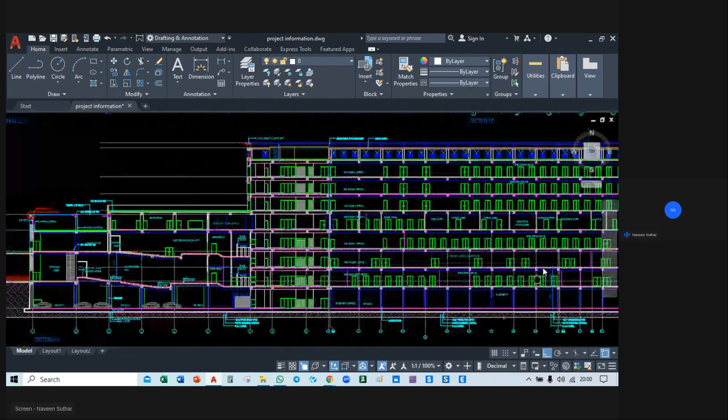You can see here, these are the elevations, and you will learn how to read the drawing, architectural drawing, and how to read the elevation, how to read the plan of the architectural drawing. There are many elevations, and you have to imagine, so your imagination power should be good. And what are the wall thicknesses, and what will be the column location as per the architectural drawing, and where is the toilet, where is the living area, and there are different areas as per the architecture.

This is, you can see, this is the auditorium in the hospital. This is architectural, and this is the structural drawing. The location of the column and beam should be decided as per the structural observation and planning.

And we will design the staircase, column, beam, and slabs as per the architectural requirements.

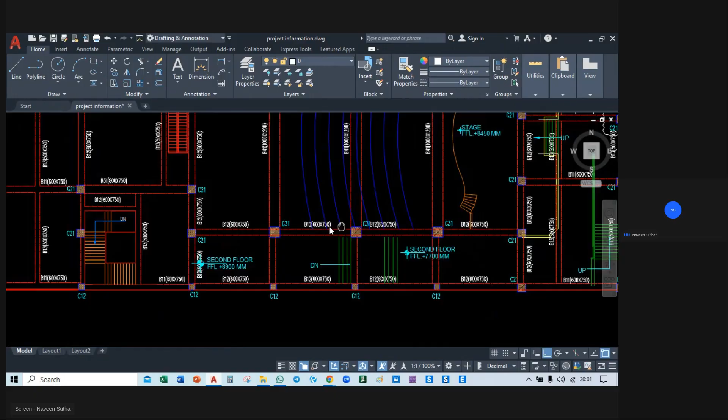This is the column and beam layout, and this is a building, it's B plus G plus 7, and similar many buildings are there. You can see, there is also one building like G plus 3, and I have designed almost 100 plus projects.

You can see there are a lot of buildings, and I think in the brochure I have mentioned only 10 projects, but I have worked on almost 100 plus projects.

As you can see, we have prepared framing as per the architectural drawing, every framing, and what should be the size of the columns and beams. This will be done after you gain experience of 1 to 2 years, you will be able to assign the column and beam sizes. But I will give you the IS code recommendations about the column and beam sizes. Right now I'm just giving you a brief introduction about the projects.

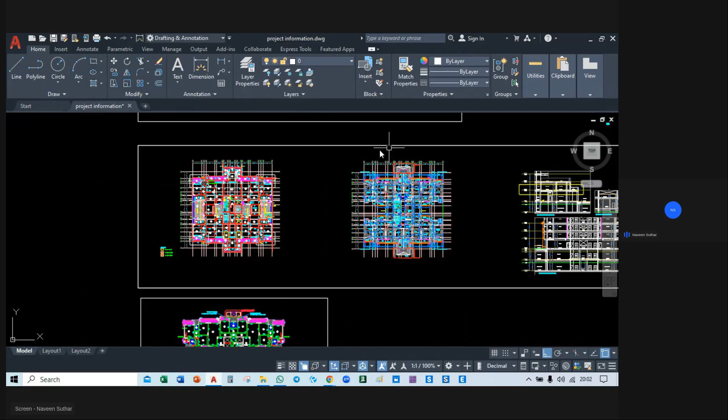You can see there are a lot of projects here. You can see there are very big projects.

So you can see these are some of the projects I have mentioned in this drawing, and you will learn about it. We will start from one building, the office building, and let me open the building project.

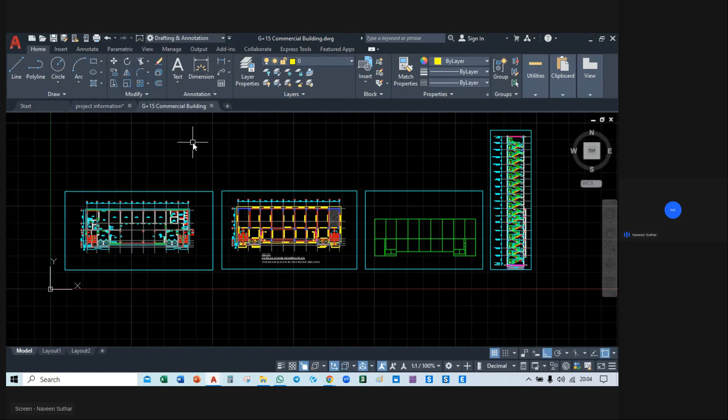So if you can see my screen, this is the building, it's a G+15 building. It's a commercial building, office building.

First we will learn how we can develop the center line, and how we will develop the framing, the column framing, and the framing of the column, beam and slab. From the framing we will develop the center line for import into ETABS, to draw the model in ETABS.

So first we will learn how to draw the center line, and you can see this is the architectural layout and drawing of the office building.

You can see these are the shops, these are the shops. I think this is the office building, there are some shops here. These are the lifts, and this is the staircase. These are the electrical room, the fire control room is there, the plumbing shaft is there.

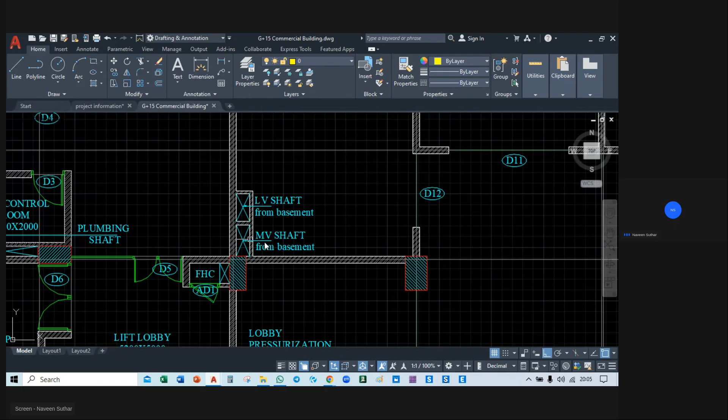These are the shafts for the basement. Some of the shafts are there, and these are the lift walls. This is a lift, cross lift at both sides.

Hello, Arnab. Yes sir. So first, tell me, do you know how to prepare the framing and how to prepare the center line?

No. Okay, so I think I will start from scratch, and I will teach you how you can develop the framing and how you can develop the center line. I think there is one more student supposed to join, and after he joins, we will start from scratch.

So first we will observe the architectural drawing, okay? Here you can see our architecture has given us the wall location and the column location, where the column location should be and where the wall location should be, and we can edit the wall and column location as per our convenience as a structural engineer, okay?

So what we will do first, we will remove the grid, okay? So what you can do, you can just copy this, Control C and Control V, okay? And you can just simply select this thing, select this area, and you will press B and space, okay? This the block definition will open, okay?

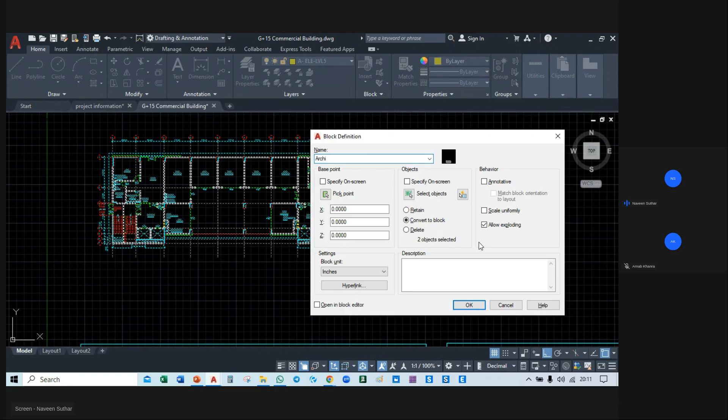So if you will make a block of the architectural drawing, okay, you can simply write archi, and if you will double click on this file, the block will be open, okay?

Now if you will do some changes in this block, okay, nothing will be changed in the outer drawing, okay? It will be just changed in this drawing only, okay?

Arnab, if you are comfortable in Hindi, I can speak in Hindi also, okay?

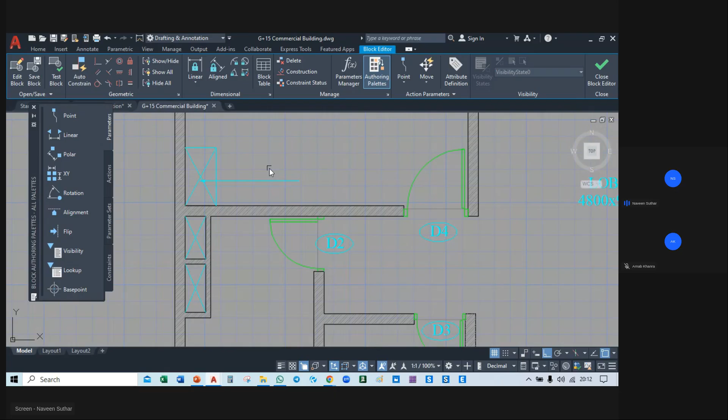Or you can just simply, if you select this and go to select similar, you can see everything is selected and you can delete just by one click. Okay.

So right now, if you can see, you can seeing only walls and walls, call walls. These are the brick walls, like the structural walls, and the column only.

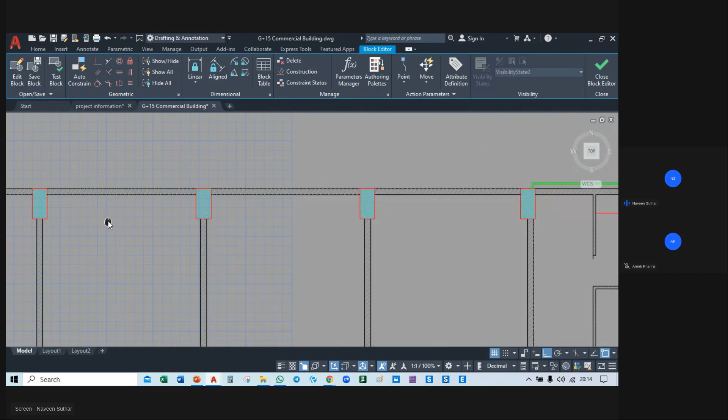So what we will do, we will take the column as per the architectural observations. Okay, so you can see the architecture is using the wall here and column at every grid. Okay, you can see. So we will take these columns.

Okay, and these are the columns already assigned here. And at the left area there is a wall, okay, you can see the wall is here. So what we will do, we will draw the beam.

So for the beam, what we will do, one minute. So the minimum thickness of the beam is 200 and the minimum thickness of the column is 200, okay, and we can't go below that 200 mm.

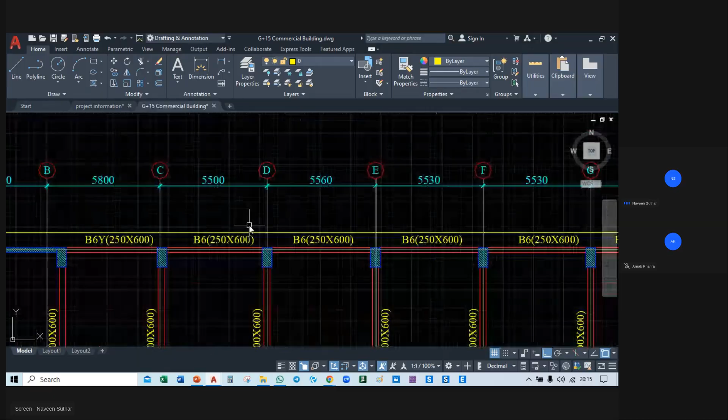So what we will do, we will just take, one minute, close, save changes. You can see in this the beams are taken as 250 by 600.

So what we can do, we can take 200 by 400, okay, also. So if the beam is failing in the design check, we can increase the size of the beam or depth of the beam. Okay, there is no hard and fast rule for the beam size.

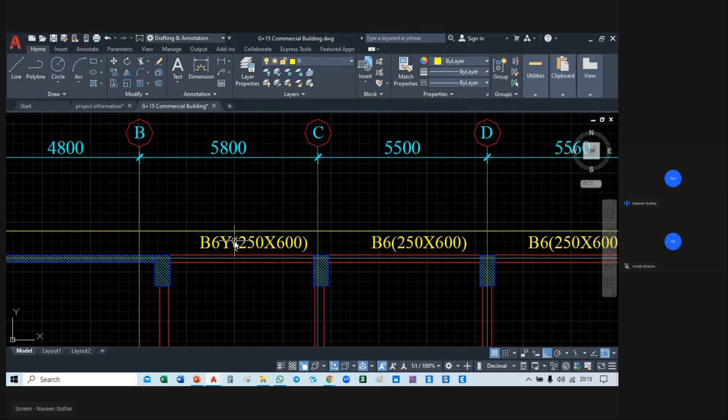So as per cost efficiency, we can reduce the reinforcement if we increase the size or depth of the beam, the reinforcement will be reduced, or there will be some criteria as per the codal provision also, the maximum reinforcement of the beam and the minimum reinforcement of the beam. Okay, so that everything we will check in the ETABS only.

So first what we can do, we can open this block, okay, and we can just simply press XL space H space.

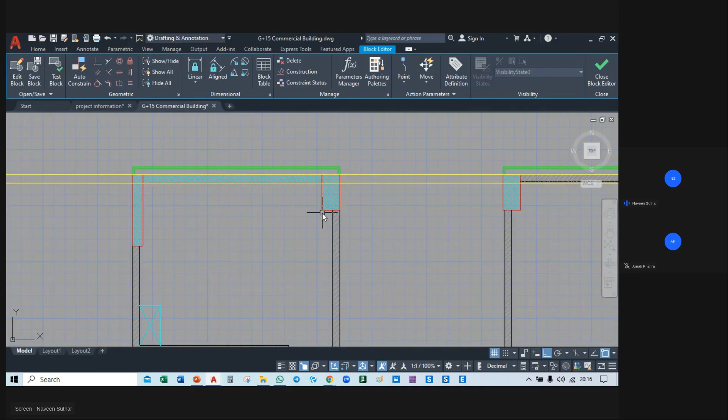So you can see that this line is there. So what you can do, you can simply paste the line at this location, and if you select this line, press CO space and pick a point here, just write 250 and enter, you can see we have a beam. Okay, so if you press TR space you can eliminate these lines at the ends.

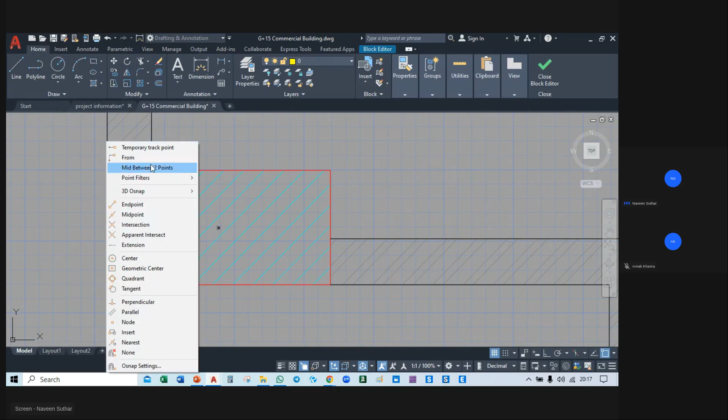Okay, so simply what you can do, you can select these two lines, press CO space and pick one point here. Or for the middle point, press shift right click midpoint, move the line, and press shift right click midpoint again. These are the two midpoints, and you can see we got the midpoint here.

So now what you can do, select the lines, CO space, and take a midpoint from here and paste at this point. So you can see we have a beam at this location also.

Format, you can simply move these lines also. And the same thing you can do at this location also.

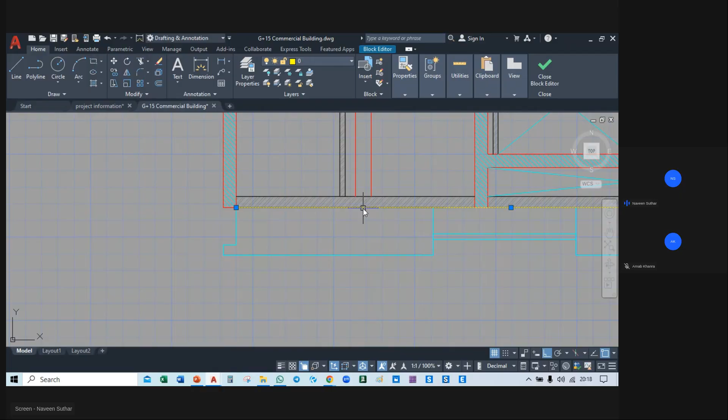Just simply copy this line, and it should be 250. And the same for this line, copy this line at this location also. You simply trim this line.

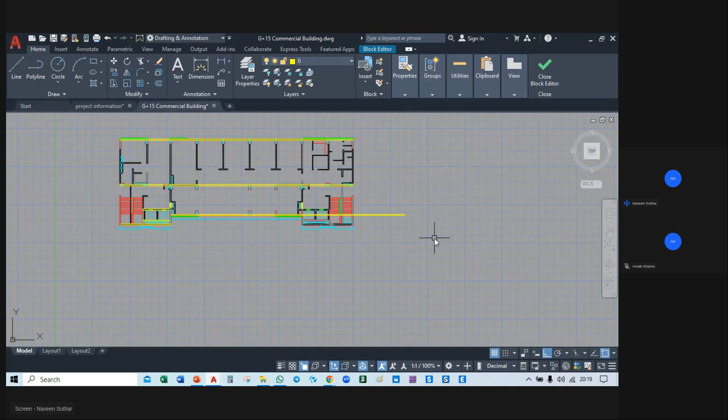You can simply copy these two lines, space, at this location also. Okay, you can simply copy these lines at this location also, and simply trim the line from here. You can select and delete this line.

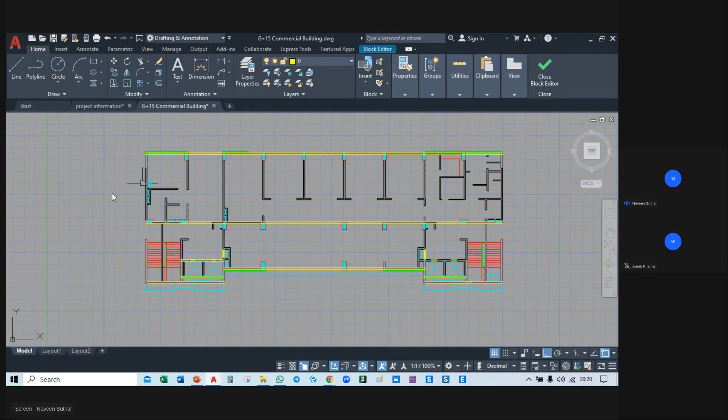So now you have to add the vertical beams. For that, we will just simply press XL space and V space. Click here, and simply select the line, CO space, and pick a point, just 250. And you can just trim from the ends, and delete the lines from the ends. You can simply copy and paste these lines at every grid.

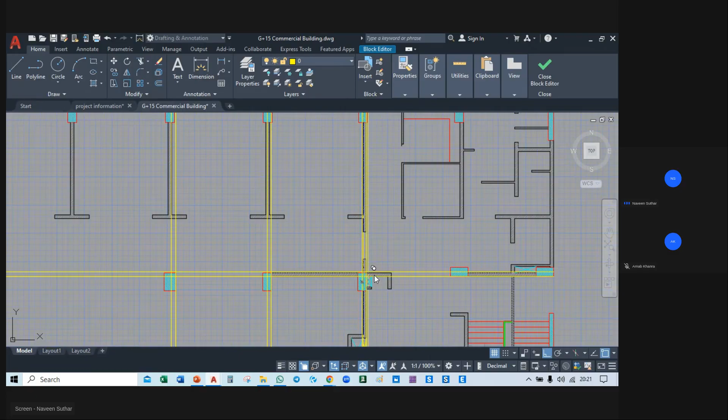So, if you want to add one new layer, you have to go to this layer property.

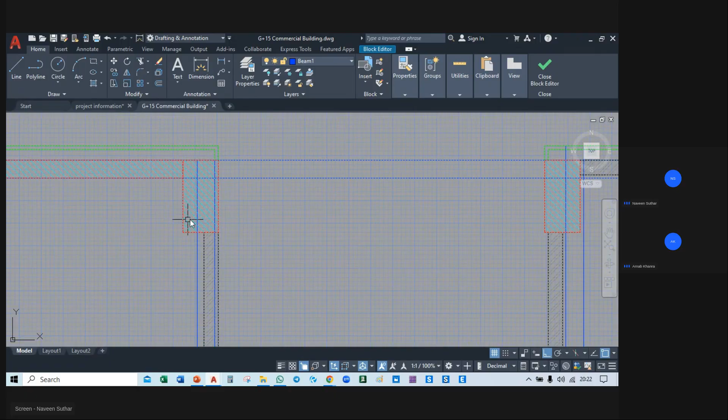So what you can do, you can simply select this, and select column, any column you can select. If you press X space, you can explode the block. So you can see now everything is in the block for the column, not in the wall.

So you can select column, or you can select beam, or go to select similar, and if you move this right, you can see this is our final product. This is a column and beam framing.

So what you can do, you can simply trim these lines from here, and from here. You can trim these lines, you can delete these lines, and trim these lines from here.

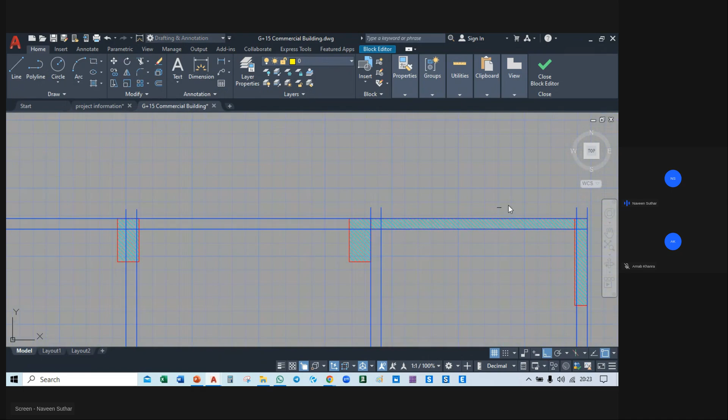And here also you can trim all the lines. You can trim the line. Or these lines also you should trim.

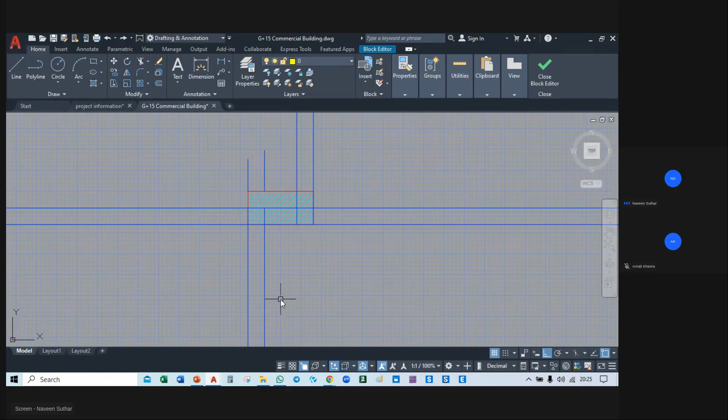But you can also break the lines. Press BR space, you can break the line, this line, and you can break from here also. BR space, you can break the line, and you can paste these lines, copy this line at this location, and trim the line here. You can delete these lines, delete these lines.

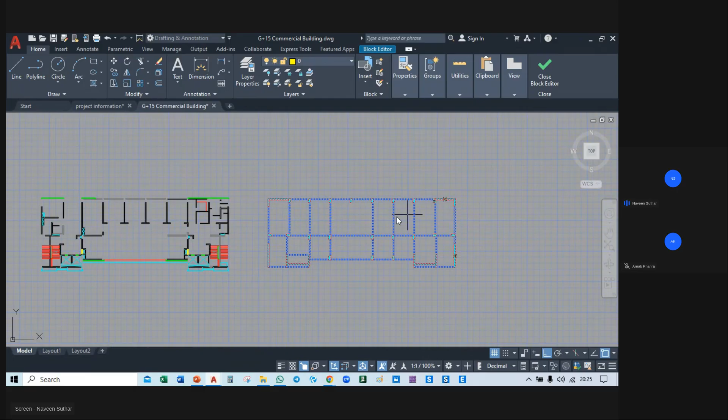Or you can break the line at this location. You can select this, or move this with M space, and move these lines from here to here. You can again move this from here to here. Now you can see everything is perfect.

Or at this location we have to add one beam, so at every wall location you have to add a beam. So you can break these lines at this location, or you can copy these lines from here to here.

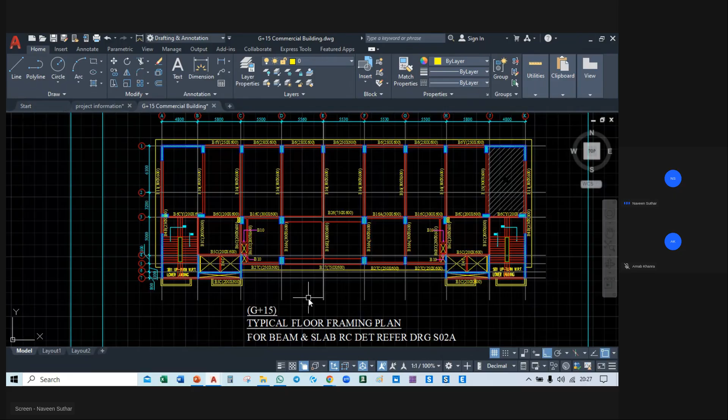Okay, so what we can do, we can move these lines from here to here, okay.

And you can see these are the cutouts. So what we can do, we can add the cutouts. So for that we will add one beam, copy, and at this location, and we can trim the line. And here you can see we can extend the line ex space, so we can extend the line also.

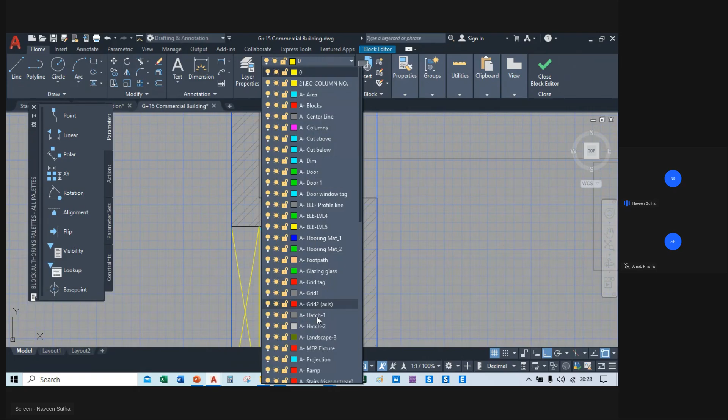So what we can do, we can go to home line. Here you have to select beam 1, and can simply draw one line at this location, and you can copy the line at this location. You can copy these line at this location.

Okay, and the same thing should be there. So what you can do, you can mirror this one. 1 minute.

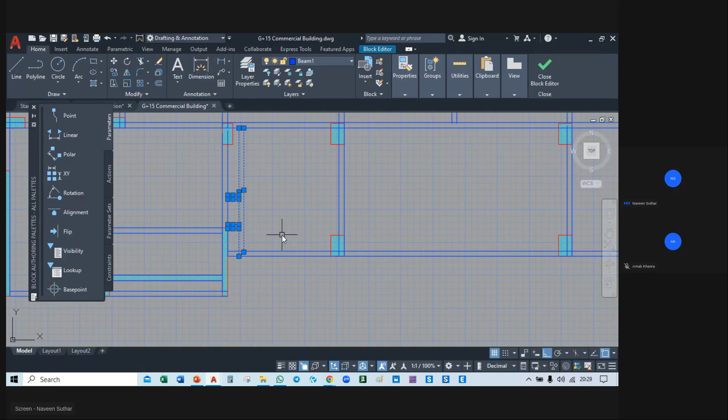So what you can do, select similar, and you can just move this from here to here, and you can select these lines and you can mirror, mi space, and you can mirror these lines from at any position. 1 minute. We can mirror at this location. You can see this is a mirror, and you can move this mirror from.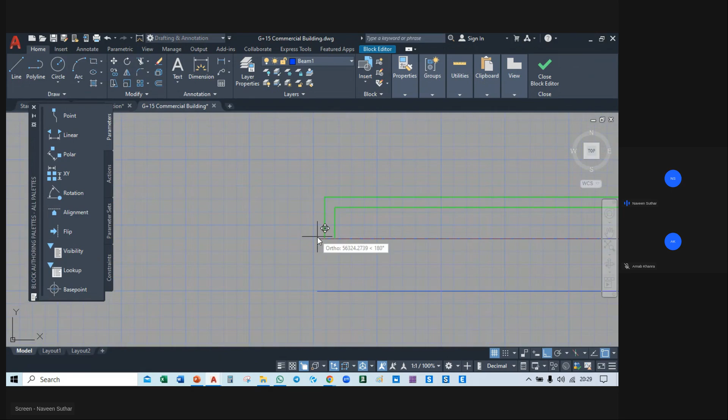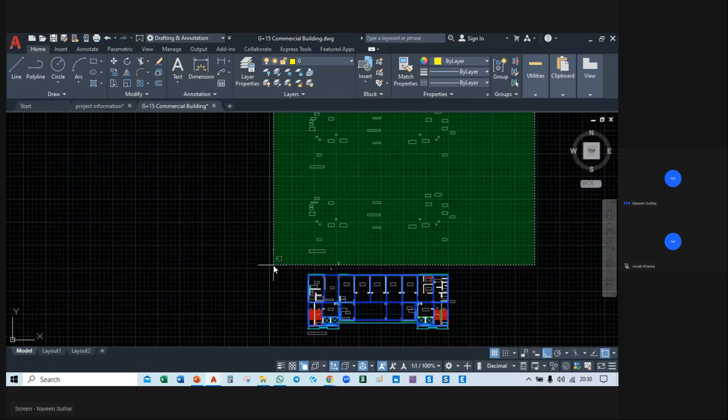You can see our framing is perfect. Okay, if we have to add one beam at this location also. Okay, 1 minute. So you can extend this beam.

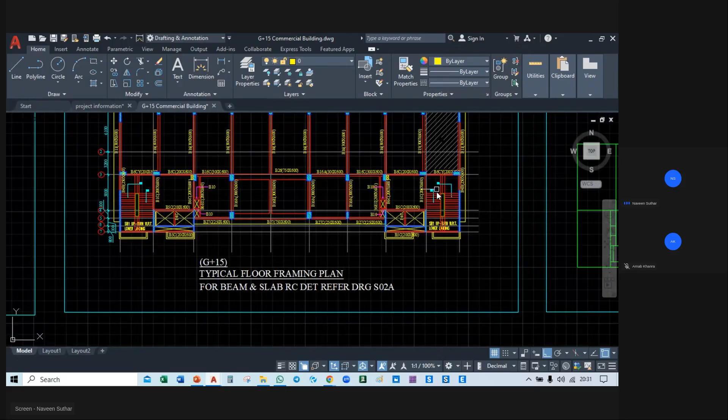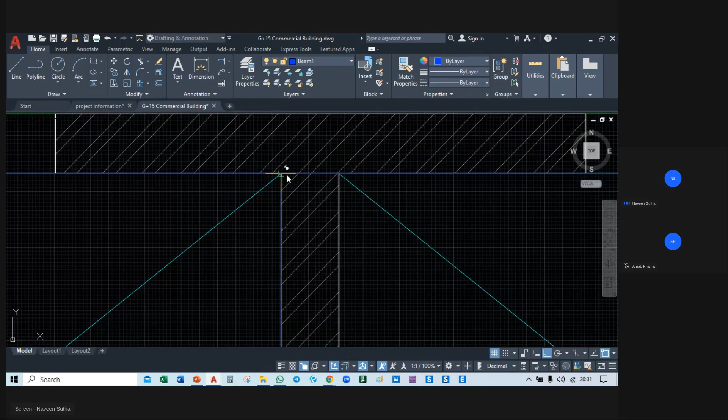I can simply select these two lines at this location also, and you can select these two lines and copy these lines. You can paste at this location. Okay, and you can take this line, and you can move from here to here.

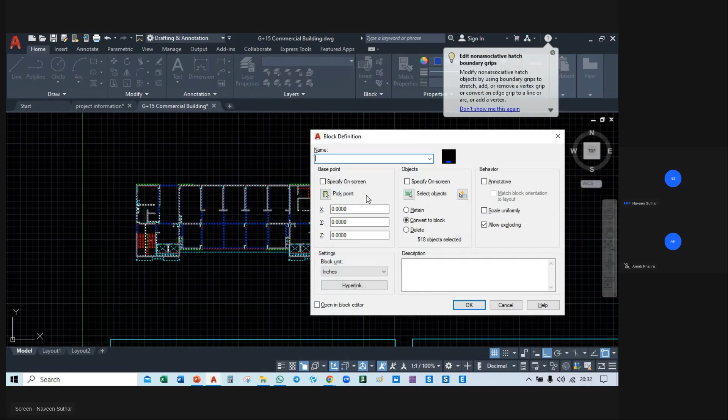If you go to block, 1 minute. If you make block B space, okay, and okay, and if you select every time, if you select similar now, so everything will be selected in the entire drawing. So for that you have to make a block every time to select similar.

Okay, and if you go to, if you take select similar, you can see everything will be selected from only in the block. And if you go to move, and you can move this and close the block and save changes, you can see we got this. If we did this in the same drawing, everything would be shifted from this drawing also.

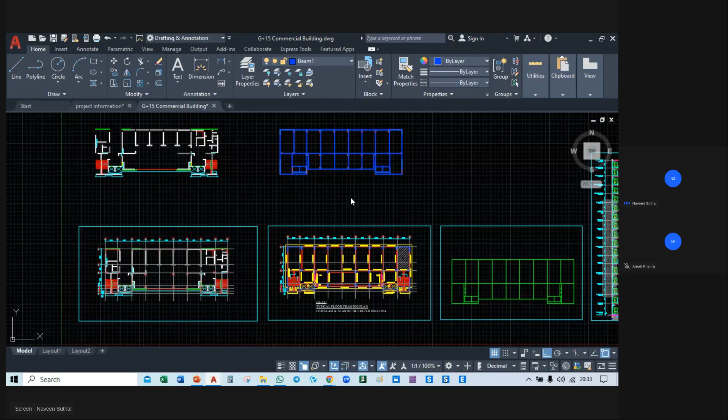So everything, so every drawing will be disturbed. Okay, so we can match our drawing from, we can match our framing from at this location. 1 minute. We can move this and at this location.

1 minute. Okay, we can close the block. We can close the block from X space. Okay, and select this, move this, and we can check our framing. You can see everything is perfect.

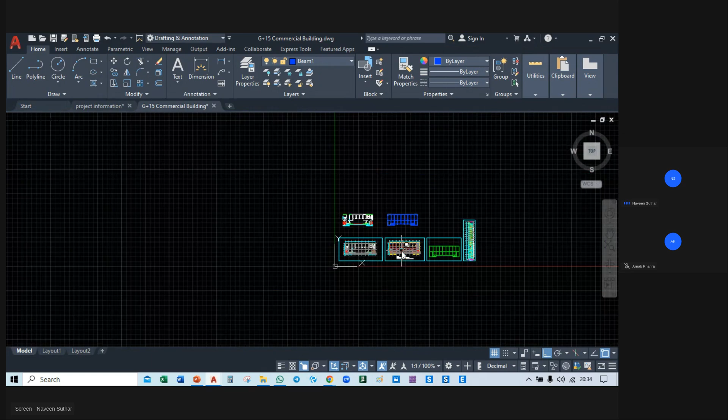So to make a center line, like we have to make center line for the E type. Okay, now, so our framing is prepared. Now we have to make a center line. We have to draw a center line.

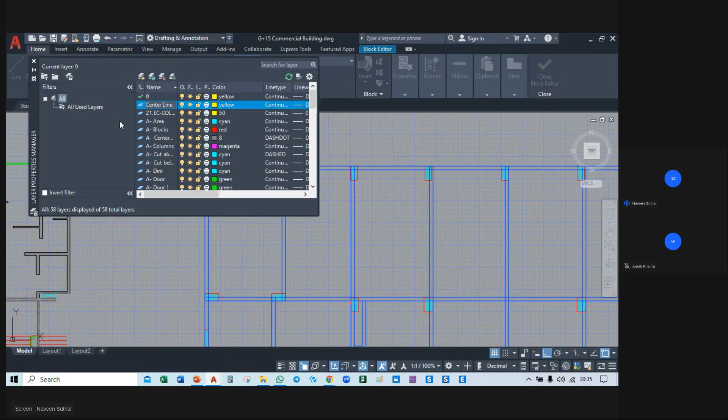So for that, what we will do, we can go to home and we will go to layer property. We will add a new layer property and we will name it as a center line. Okay, and let's take it. Center line is already there, so we can use like 1. And let's take it red. Okay,

And we will cross this and we will go to at this location and we will take center line 1. Okay, and we will go to line and we will press shift and right click and we will take a 2 point, and we can take 2 point from this location, and we got the center line here.

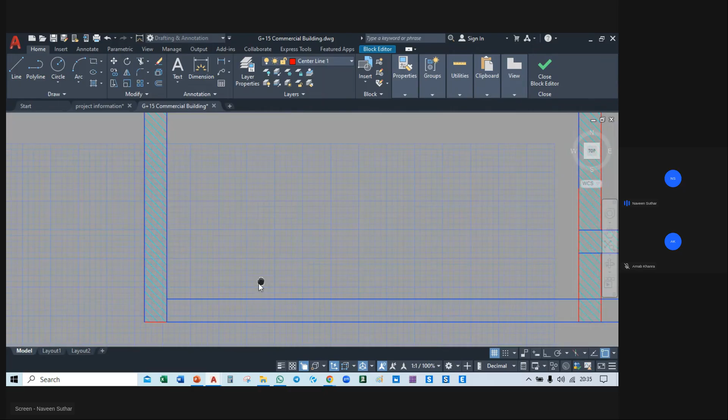Okay, and 1 minute, control Z. If you press F8, if you press F8, you will be able to draw orthogonal lines. Okay, so again go to line and press shift. We will take 2 point. Okay, you can see, and we will draw the center line like this.

Let's change the color of center line. Let's take it green. Okay, and now what we can do, we can copy the center line, and we can copy center line at every grid location. You can see.

Okay, okay, okay, okay, okay, okay.

Okay, just press XL H space. You can see this. And what we can do, we can press shift and we will take 2 points.

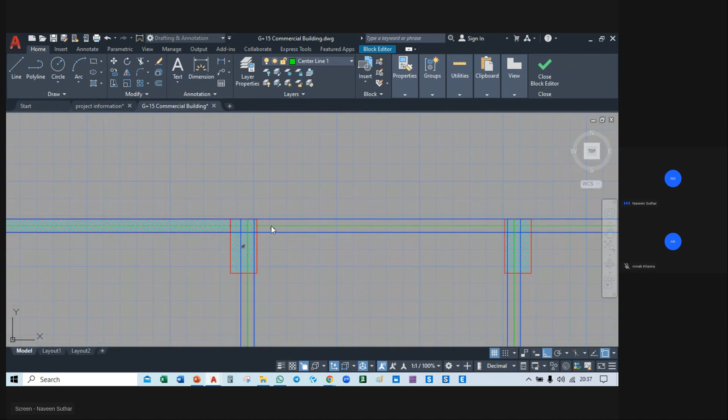Okay, so what we can do, we can trim the lines from the ends. And we will copy this from this point to this point, and at this point, and at this point also. And what we can do, we can select the line, select similar, and we can move this from this location to this location.

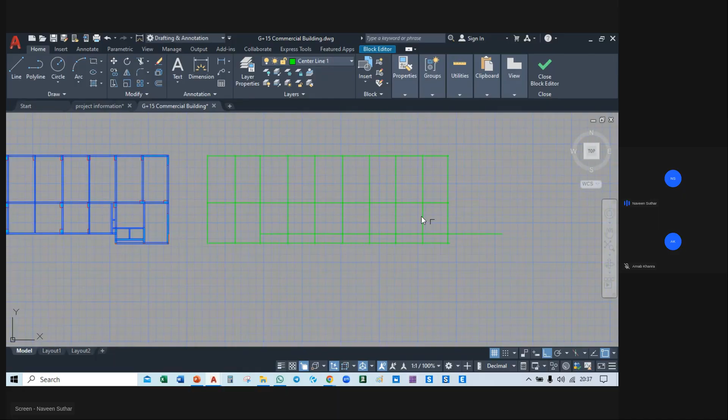So what we can do, we can trim the lines, extra lines. We can trim the extra line. Okay, 1 minute, close the block, save the changes. What we can do, okay, so we can trim these lines also.

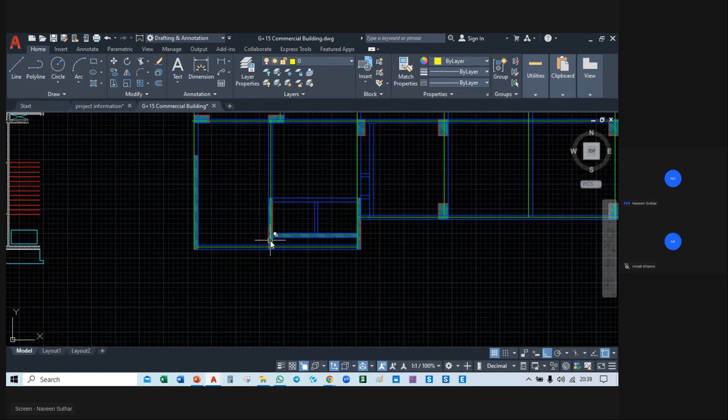Okay, again what we will do, we'll move this from this location to this location. And what we will do, we will break the line, and we'll move the line, and take a center line, that is shift, take 2 points and these 2 points in mid. Okay, and everything is perfect at this location.

What happened? What is this? Okay, 1 minute, we have done something wrong. Okay, so let's...

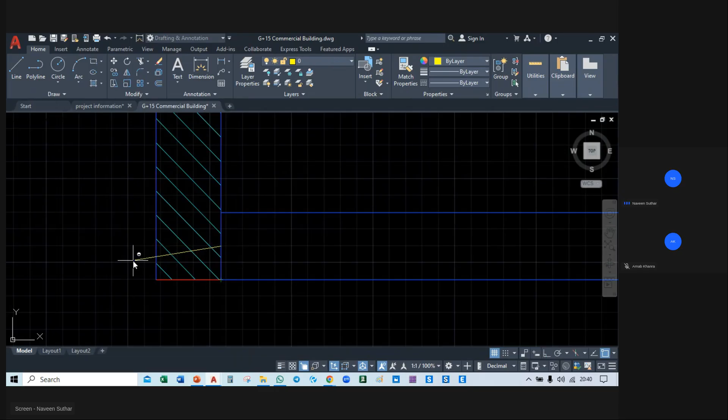Go to line and take shift, take 2 points. Okay, and shift, take two, line, shift, take 2 points, and okay, yeah. And now what we will do, we will extend the line and trim the line, and we will take the entire line and move the line at this location to this location. Okay, and now you can see everything is in the middle. Every line is in the middle.

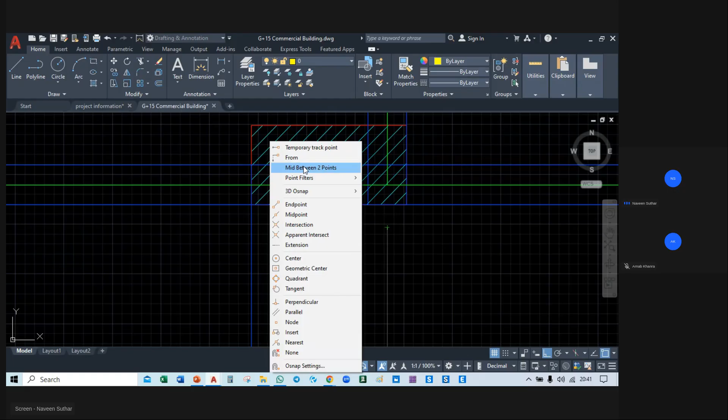So what we will do now, we will break the line at this location, and we will move this, and we will take the midpoint. We will move this. Okay.

And what we can do, we can break the line at this location, and we can delete this. Again, we can break the line at this location, and we will delete. We can move this line from here, and we will take the 2 points, midpoint. Okay.

Everything is perfect. Now we will add these lines. So what we can do, we can go to line and shift midpoint, and you can do midpoint and this line. Okay, now you can see this line is this one. So what we can do, we can match the line also. If you press MA space and select this line and click this line, you can see now it is the center line.

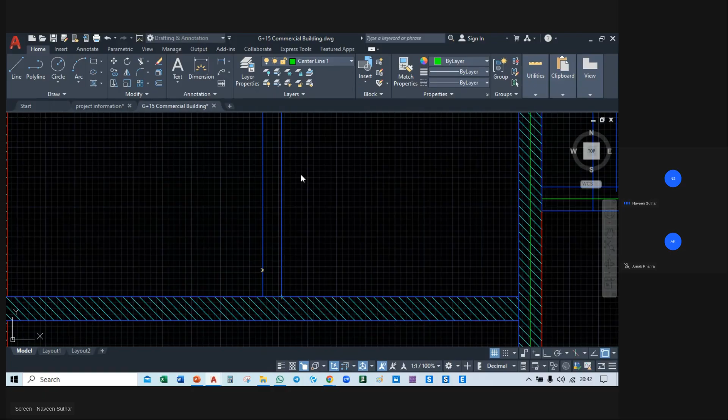Okay, so you can match the lines also. And again, I think we have to, or you can simply go to center line 1. Where is the center line one? Okay, you can go to center line and you can take the line or simply shift, take midpoints. You can take midpoint also. Control that. Take midpoint.

Okay, and similarly you can copy these lines from this location to this location. Okay. We can simply move this line from here to here. Okay.

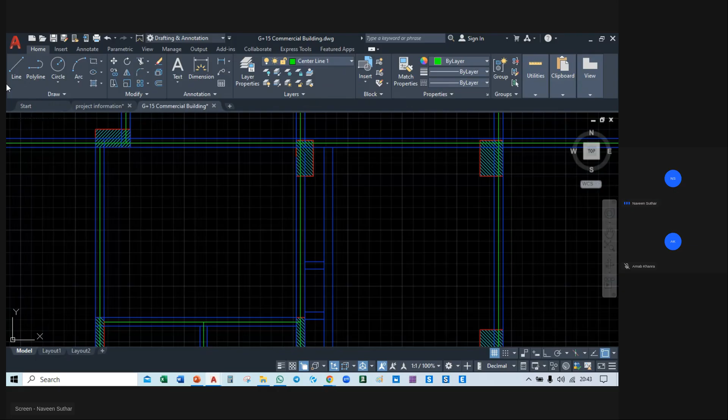And every line we have drawn, and I think we have to draw this position, this line. So what we will do, we will just simply take the 2 points and this one, and just simply we will take the line, take 2 points and simply we will draw the line. Simply move this line from here to, copy this line here to here.

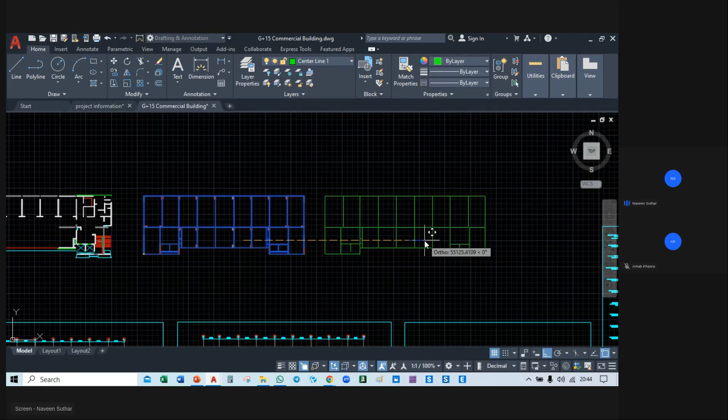Okay, simply select the line, select similar, you can move the line from here to here, and now we will check every point. So everything is perfect at this location. You can see we have to remove the extra lines. Again, we will extend the line by ex space. Okay, and we will also extend ex space. Okay, this location is perfect.

Ex space. Okay, and I think this ex space, this is also like this, this is also like this. Okay, okay, and this is also like this. Okay, this is also... we will trim the lines, extra lines.

I think everything is perfect. You have to check every joint, it should be perfect, because in ETABS you have to do everything again. So please make sure that you have done everything right in AutoCAD.

You can see here we have to extend this, because if you have left every joint not connected to each other, it will give you an error in ETABS after that. So please make sure everything's perfect.

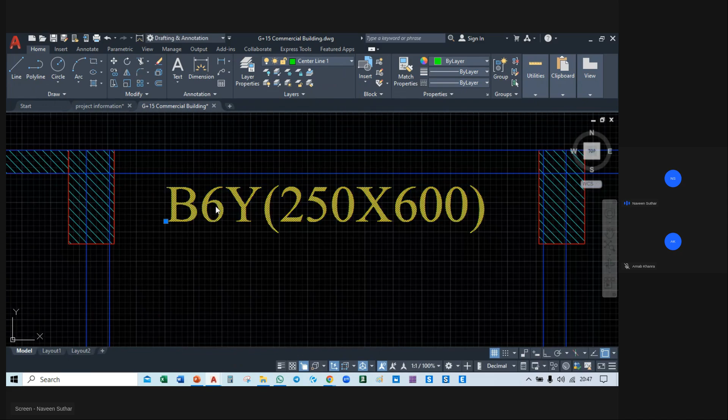So we have created framing, we have created the center line also, and we can name the framing if you want. Simply you can copy this and paste here at this location. This is the first beam, and you can name it B1, and let's take it 250 by 500.

You can simply copy this at every location. First, we can reduce the size also. Simply, if you select this, SC and space, you can reduce the size. Let's reduce this. Now this size is perfect.

If you can move the size, we can move the text, and we will select the text and copy this at every location.

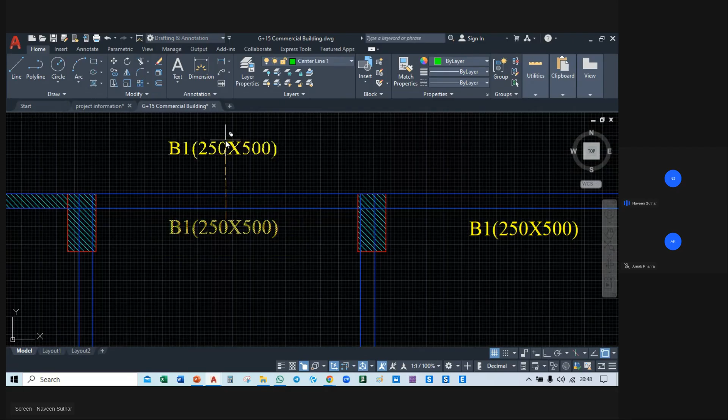You can rotate the text also. If I copy this from this location to this location, select the text, RO space, pick the point, one minute, RO space, pick the point, and you can simply move it from vertical also, and you can move this with F8, and paste at every position, copy at every location.

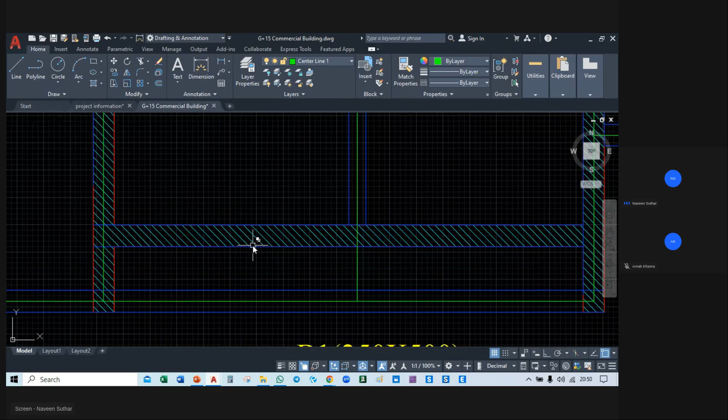So what we can do, we can simply go to line, and we can take two points, this two point, and we can simply trim this.

We can delete this one, and we can select the line, and copy the line at this location to this location. We can select this and select similar, move this from here to here, and extend the line. We can extend the line, and we will trim the line.

Okay, now everything is perfect. And you can also name columns and wall also.

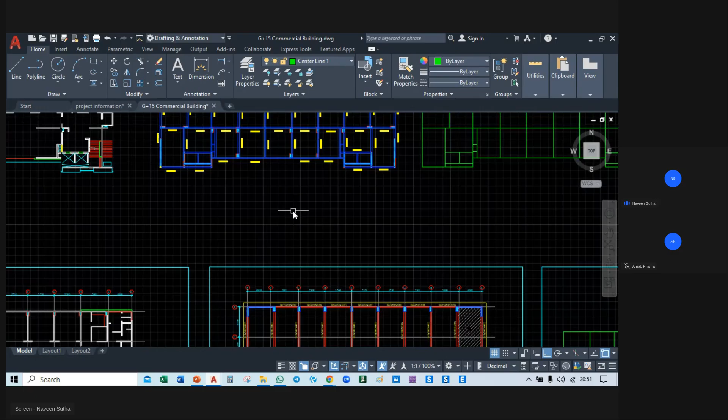So what we will do, we will take a text. We can copy this, and paste it here, and we will double click, and remove this, and take it like C1. Just move this at this location, and you can change the name.

We can also change the color. So C1, and we can just copy this and paste at this location, and this beam is B1.

So beam is B1, column is C1, and you can copy and paste the same name everywhere. If the size is same, you can put the same name. If size is different, you can put a different name.

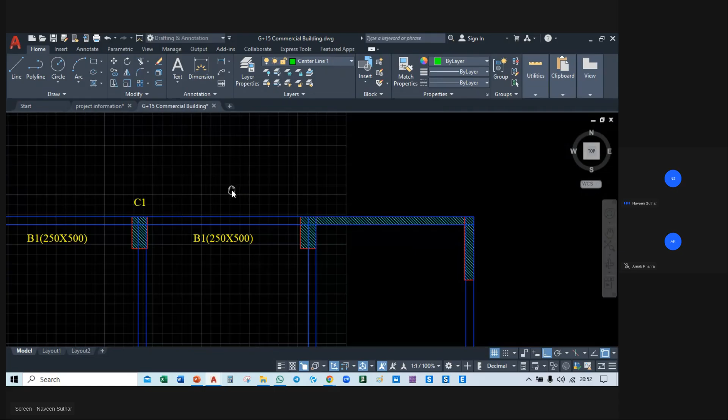I'm just giving you the information right now, how you can create the drawings, and how you can do the changes in the drawing. At every location you can use this.

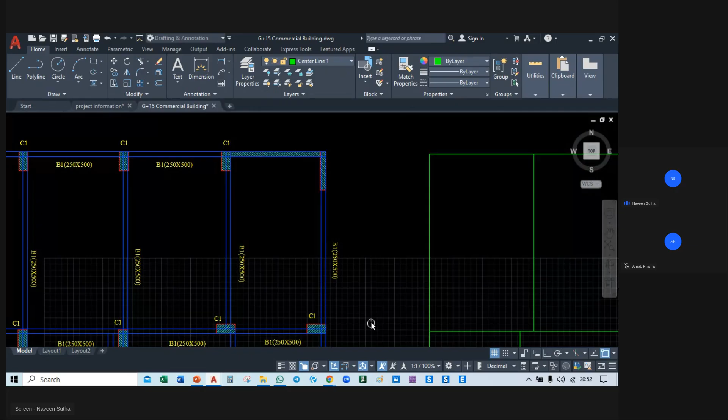Into the B1, and you can copy this at every position. So this should be B1, B1, B1.

And you can change the name if it's C2. And it's a B1, B2. You can change the name like this.

So now, do you have AutoCAD and ETABS on your PC? Yes, okay.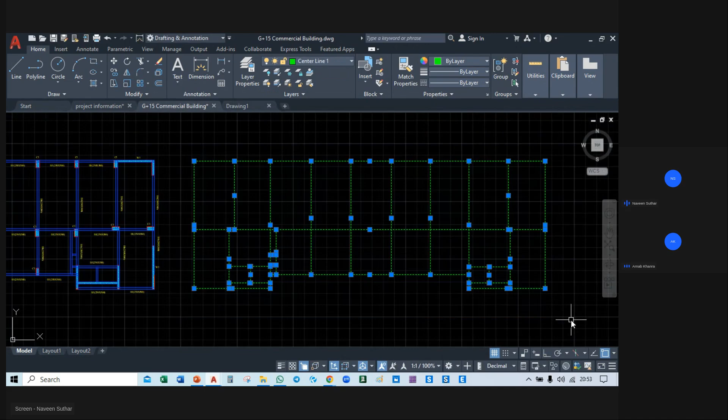So what you can do, to save the DXF, always take a new file and copy the DXF file, and paste at this location.

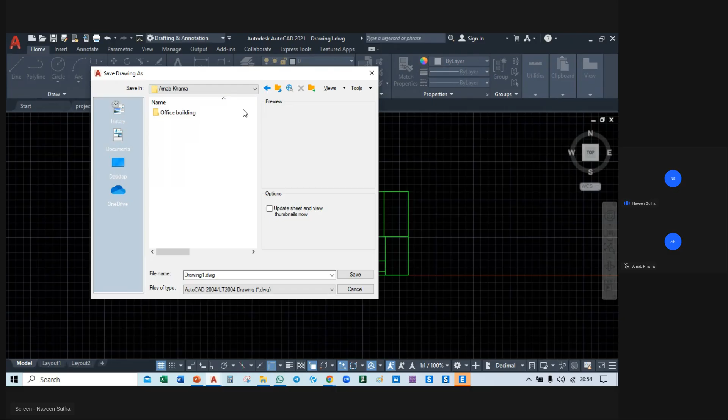First we will save this as a DXF. So if you go to Save As, I think we have to open the course and Arnab office building folder, and you can make a folder DXF, and you can paste the drawing there.

One minute, we have to save as. Don't forget to save the file as a .dxf file, and you will save the file. And always close the file because it will give you an error otherwise.

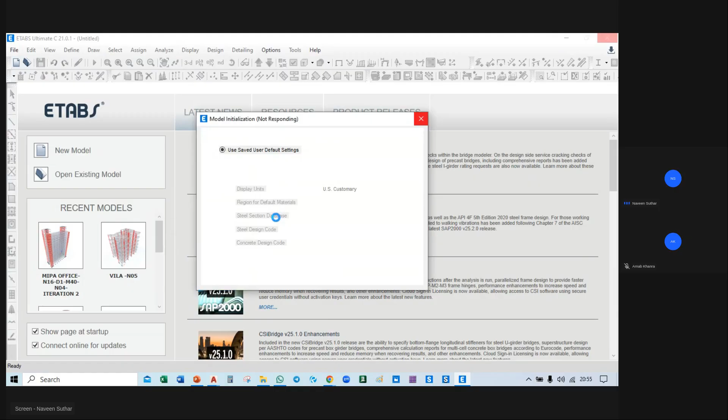Now what you will do is go to file, go to new model, and use built-in settings. And you can take a reference model also. You know how to take reference model.

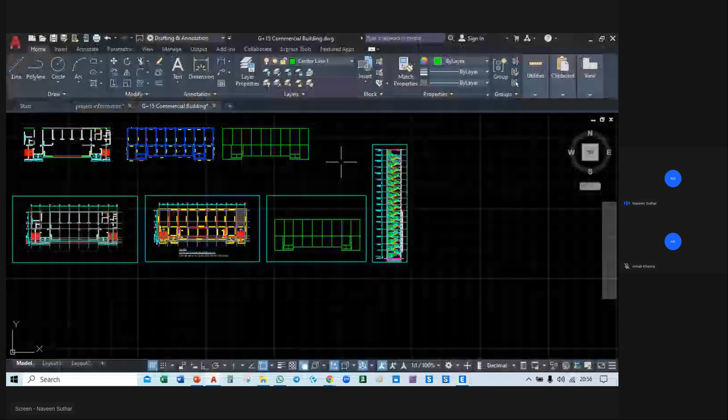Take the story level at story level 1, and it should be Z. The beam property should be concrete beam, column property should be concrete column, and the floor plan should be deck 1.

We will save the file, and we will save the ETABS file in the ETABS folder, and let's take it as a G plus 15 building. And we will save the file.

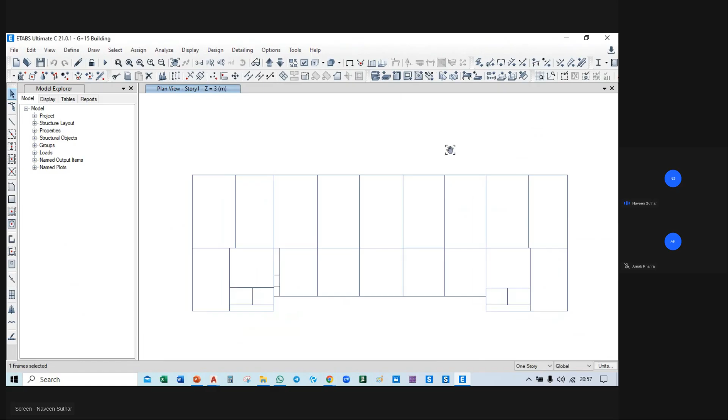So you can see this is story 4, and we have saved the DXF at story 1. So we will go to story 1. You can see we got the DXF.

It's a perfect DXF, we have successfully imported the DXF. I think up to here you have to do it by yourself, and we will take the class tomorrow now.

If you have any question, you can ask me anytime you want. Do it by yourself, and if you do everything by yourself, you will get the confidence to do it.

You can see we have not gotten the DXF at this location. At this location, I will try myself to see how it can be done. You can see there is none.